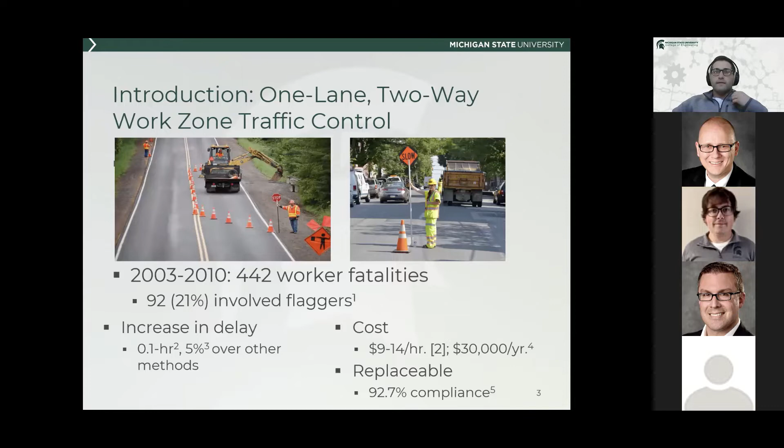Jordan, can I jump in real quickly? Could you turn off your video? Your audio is a little bit garbled. Yeah. Reduce your bandwidth. All right.

Okay, so just to give an introduction into one-lane, two-way work zone traffic control. The most common method is what you can see here, which is a flagger, whether they're stationed at one end or both ends of the work zone with the slow stop paddle. However, a study from 2003 to 2010 by the U.S. Bureau of Labor Statistics showed that there were 442 worker fatalities within roadway construction zones, and 92 or 21% of those fatalities involved flaggers. Flaggers are also shown in some studies to cause an increase in delay.

Two separate studies showed a 0.1 hour or 5% increase over other methods like portable traffic control signals or pilot vehicles. They've also been shown to be costly, up to $9 to $14 an hour or $30,000 a year, which is a significant amount when there needs to be multiple flaggers on a site, and that money could be reallocated towards other construction activities. They've also been shown to be replaceable with high compliance rates, so up to 92.7% of drivers were compliant with other methods like the pilot vehicle or portable traffic control signal.

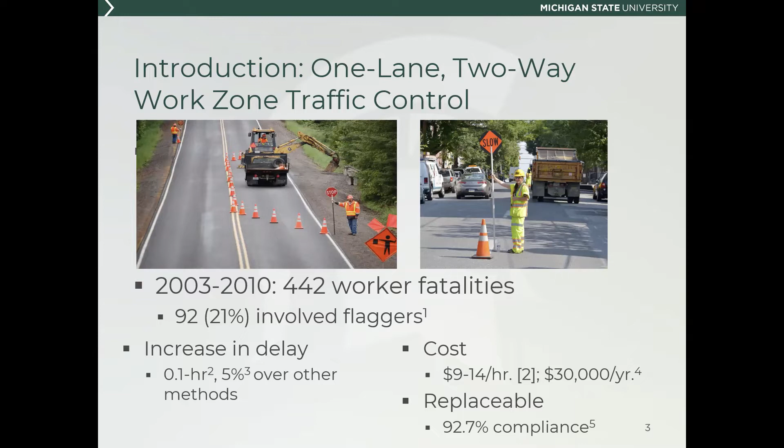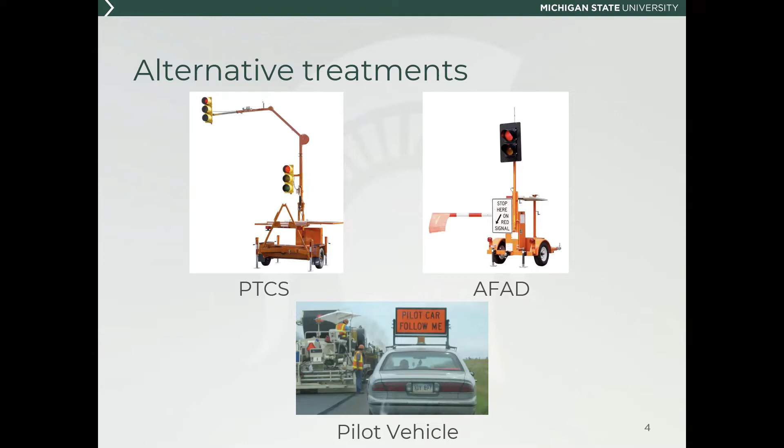The DAD was introduced by Texas Department of Transportation and the Texas Transportation Institute for use at low volume access points like residential, commercial driveways, or rural intersections. It essentially works in conjunction with portable traffic control signals and allows for the removal of flaggers at low volume access points. I will get into how they operate in the next slide. They've been shown to operate with high compliance rates by TxDOT and Michigan Department of Transportation. Up to 82.8% of drivers conduct a legal movement when faced with this device, and up to 95.7% of those movements were considered safe movements.

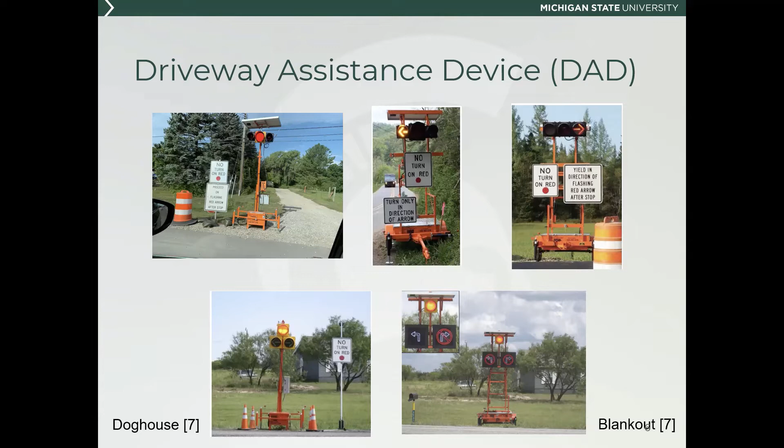And this would work in conjunction with any other access points that are within this work zone. And just to mention that these portable traffic control signals would be at either end of the staging of the work zone at that time.

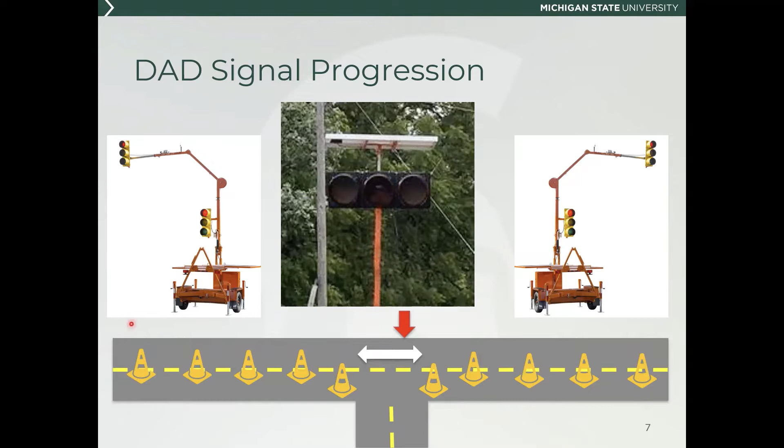So just some quick literature review. Two of the main studies that were used when we were working on this study were a study by Melisa Finley called Traffic Control at Access Points Within Alternating One-Way Operations. And essentially this was comparing a controlled and non-controlled study of two different driveway assistance device designs, which are shown below. So the doghouse is the one on the left, and then the blank out is this one on the right, which has sort of diagrammatic signals to alert drivers.

And essentially what it showed is that the doghouse design was much less understood and complied with than the blank out device on the right. And so some issues noted were based on the yellow arrows on the doghouse, which were potentially misunderstood by motorists who may have thought that the yellow implied a yield rather than the intended meaning, which was to stop and then proceed.

In this picture, you can see a no turn on red sign. However, in this study, it was mentioned that that sign was not present. So that turn prohibition was not a part of that study. And then often drivers had to ask the road workers how to approach the device and what was the correct movement.

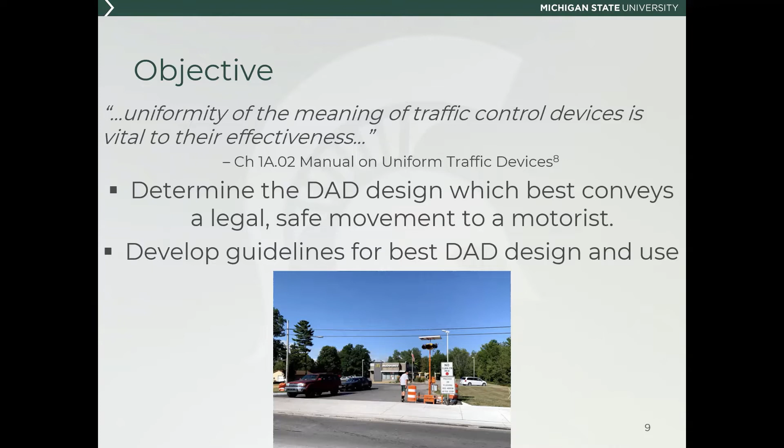And so with all that said, and the lack of standardization of the device, the inspiration for this study comes from the MUTCD, which states that the uniformity of the meaning of traffic control devices is vital to their effectiveness. So essentially, this project aims to determine the DAD design which best conveys a legal, safe movement to a motorist. And mainly that was conducted in this study by looking into different auxiliary signs to be used with the device. And then ultimately, once the best design was uncovered, the results will be used to develop guidelines for the best DAD design and use.

So just to get a little into the data collection that we conducted for this study, there was a digital motorist survey, and then subsequently last summer, there was a field data study. So the survey was structured with questions in 2 different ways. So the first question style was a sign message / signal rating, where the participants in the survey were given the proper legal action and were then asked on a scale of 0 to 5 stars, similar to an Amazon rating, so half stars were also available, how effectively does each of the following signs or signal communicate the proper action?

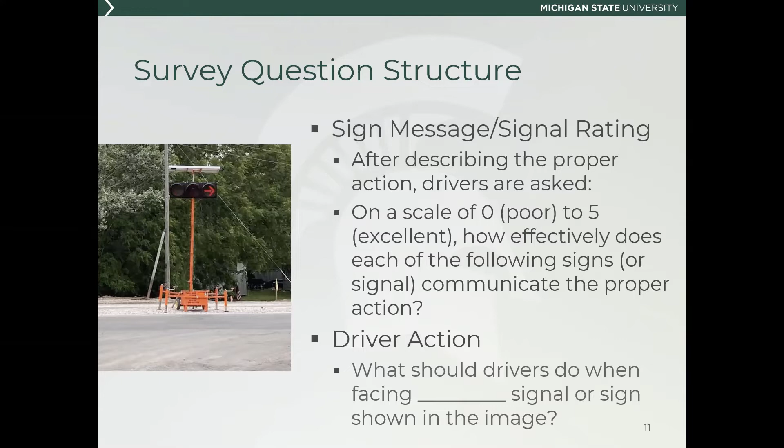And the second question was a driver actions question, where the participants were given an image of a DAD signal or sign and then asked what the correct action was. So the survey objectives were basically to determine the comprehension of these 5 signs in this row, the comprehension of the signal arrangement and signal color, the arrow color, and then the importance of including a no turn on red sign with the auxiliary signs.

So a quick survey summary. It was a nationwide Qualtrics online survey of drivers over 18 years old. Overall, 1,015 genuine answers were collected. It was about a 50-50 male-female split with a median age of 35 to 44 and median annual miles driven of 8,000 to 12,000. So just getting into some of the preliminary results from the survey about the sign message without no turn on red.

So the results so far have shown, when you look at the mean rating, that the three highest were the wait for arrow before turning at 3.64, the wait turn only in direction of arrow at 3.60, and the turn only in direction of arrow at 3.66. And these three signs also had the highest percent of ratings at or above 4.5, and subsequently the lowest percentage of ratings below 2.0. So that could really indicate the importance of including this wait message with the auxiliary sign, as that seems to have been important in the understanding of the device with the high mean ratings.

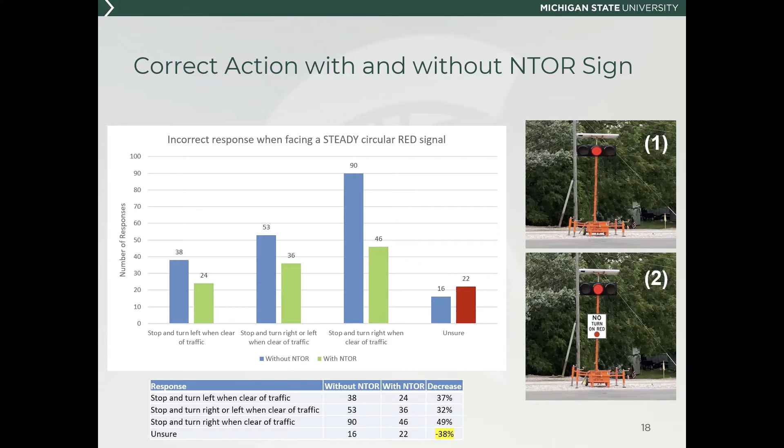And so just to get into the field data study now, which we conducted this past summer of 2020. So our project location was on US 31 in Benzonia, Michigan, which you can see highlighted in red on that state map. And in this area, US 31 is a 2-lane rural highway with a center turn lane. And essentially this portion of US 31 is in a low density commercial area. There's a strip mall on one side and some smaller businesses on the other side, restaurants, car garages and trailer parks.

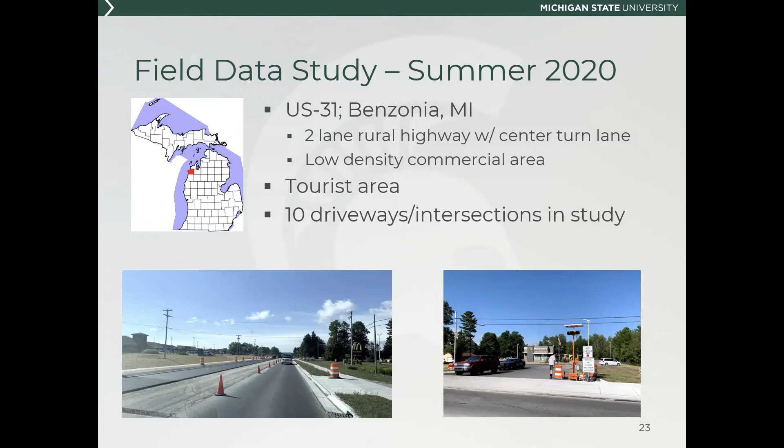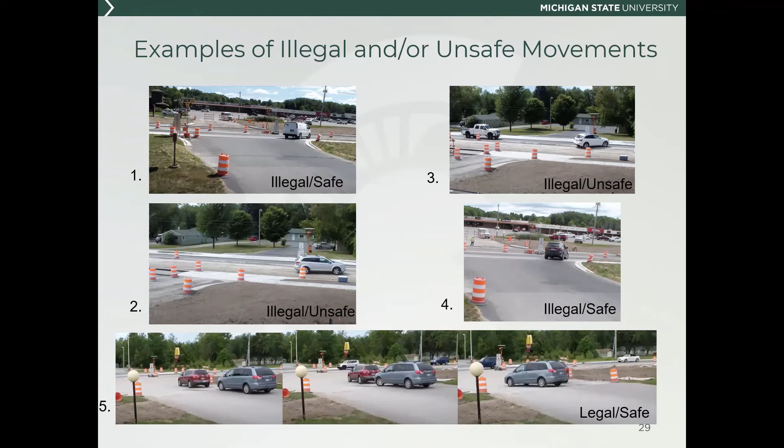And just to compare safe versus unsafe movements, obviously most of these movements were safe, both illegal and legal movements. The far majority were safe, which is good. But ideally in the future, the work with this device will be attempting to convert all of these illegal movements and these unsafe movements to a legal and safe movement.

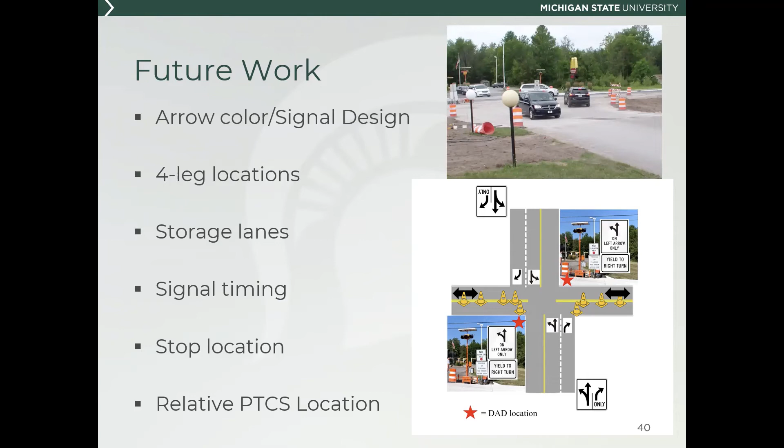Also looking at stop location, which was not standard in our study, would be important to see if the stop location had an effect on how drivers interacted with the device. And then something that was mentioned in previous literature is relative portable traffic control signal location to the DAD, where if a motorist was able to see that PTCS or the platoon entering or leaving the work zone, if that had an effect on whether a driver was more or less likely to jump that steady red signal and make an illegal movement. So these are my references, and thank you for listening.

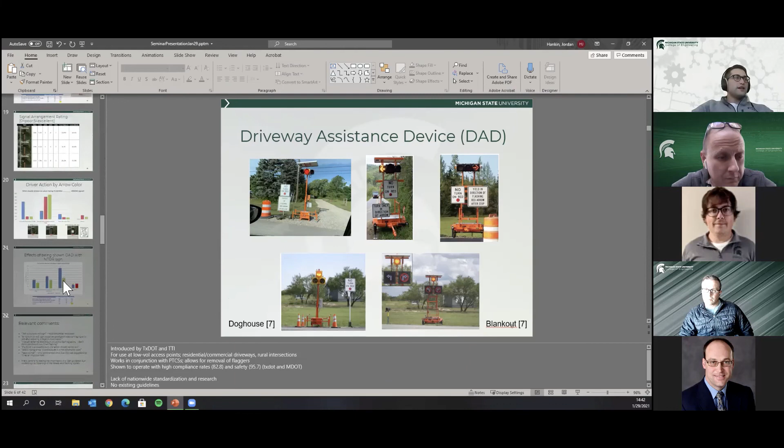Yeah, I think that is certainly something we're looking into. The majority of our sites were really low volume, but a lot of our data came from the McDonald's, the Save-A-Lot, and the trailer park. I'd say the trailer park was probably the most resemblant of a really low volume site.

And I think that's something that we can look into, the cutoff point. The study from Texas that I referenced, that was at a rural intersection in really rural Texas. I think they got less than 100 people observed interacting with the device. So that might give some insight into how well people react. But yeah, we'll definitely look into that cutoff point, I think.

I think one other aspect that's really important to this is the distance from, can they see the end of the work zone, of the lane closure? Can they see the traffic signal at either endpoint? And that really plays a role in their ability to kind of watch and monitor the queues, the platoons that are coming or going away.

Now, I will say also the McDonald's location is probably a little bit on the upper threshold. I think we had very high volumes, higher than maybe anywhere else for the use of the DADs, to the point where it might have been actually a location that would have warranted a portable traffic signal, especially at the McDonald's where there was the ability to go across. I'm surprised they didn't consider putting a portable traffic signal there to control all directional movements.